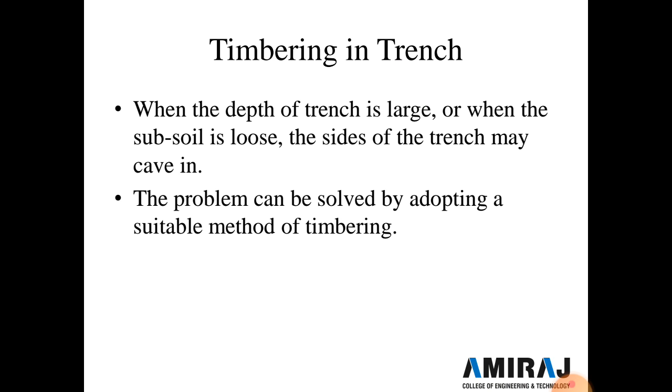Timbering of deep trenches can be done with the help of the following methods. There are 5 methods given here, and we will discuss them one by one.

The first method is the stay bracing method, second is the box sheeting method, third is the vertical sheeting method, fourth is the runner system, and fifth is the sheet pile method.

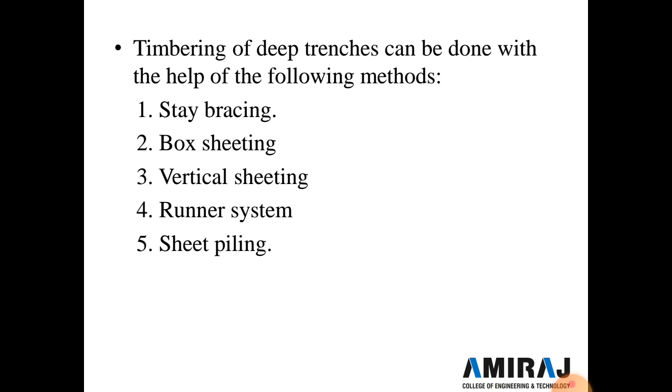Let's start with our first method, the stay bracing method. This method is used only for supporting the sides of a trench excavated in fairly firm soil when the depth of excavation does not exceed 2 meters. So up to 2 meters, the stay bracing method is used, and it supports the side of the excavation.

This method consists of placing vertical sheets or piling boards opposite each other against the two walls of the trench, and holding them in position by one or two rows of struts.

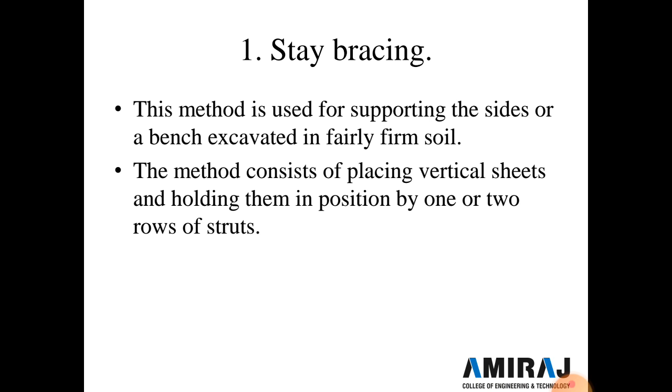The sheets are placed at an interval of 2 to 4 meters generally, and extend to the full height of the trench. The piling board may have a width of about 200 mm and thickness of 44 to 50 mm, and the strut may have a size of 100 mm by 100 mm for a trench up to 2 meter width, and 200 by 200 mm for a trench up to 4 meter width.

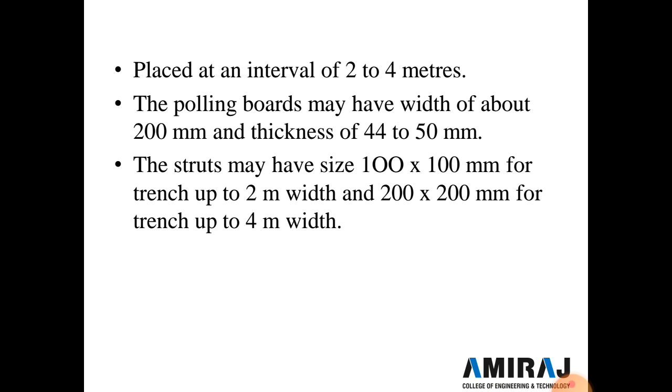See this figure: the piling board is supported by the strut, and this strut is fixed on the opposite side of the piling board. So no loose soil or other material falls down during the excavation. This type of method is only used up to 2 meters depth of excavation.

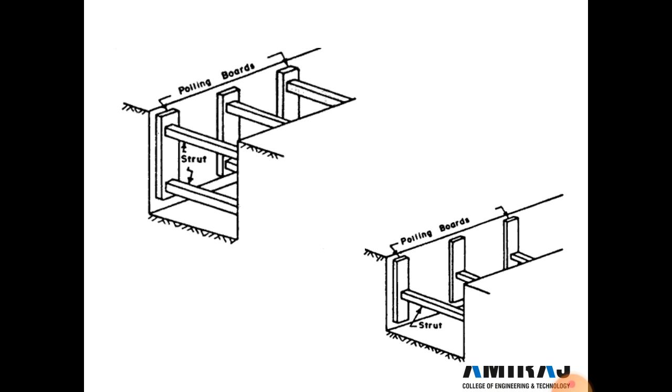Above 2 meters depth of excavation, the box sheeting type of timbering is required. In the next slide we discuss about box sheeting.

Another system of box sheeting, shown in the figure, is adopted in very loose soil. In this system, sheeting is provided longitudinally where it is supported by vertical walers and horizontal struts. If the height is more, braces are provided along with the struts.

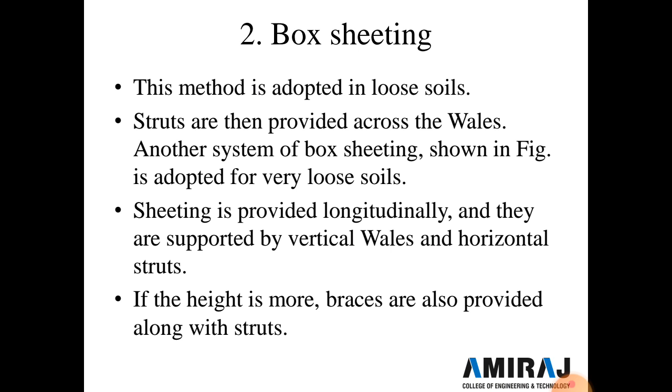In horizontal sheeting, a horizontal plank is provided and walers are fixed vertically. In vertical sheeting, the walers are provided horizontally, supporting the vertical sheeting.

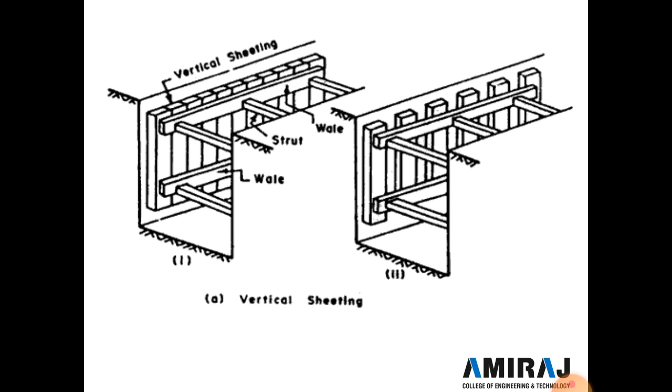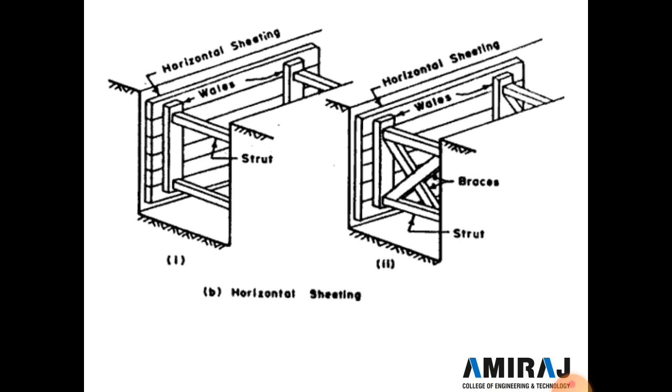In figure number 1, vertical sheeting with no gap is provided only where the soil is loose, like sandy soil. And in a regular soil where there is no loose material, this type of gap is provided for sheeting work. Now next we discuss the vertical sheeting.

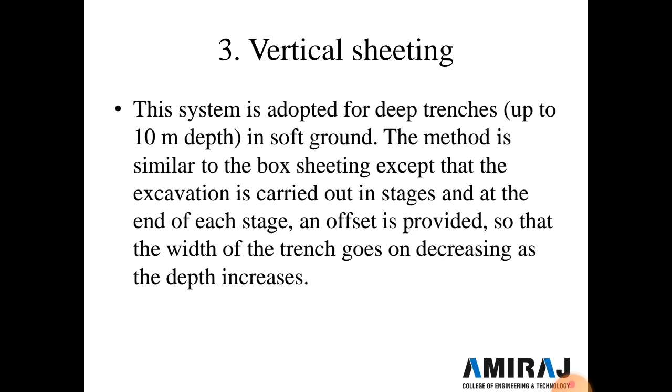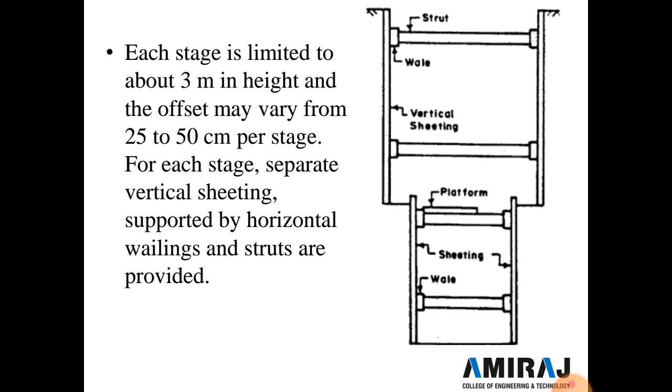This method is the same as the box sheeting method, but here the only difference is that an offset is provided at some interval. This type of method is only used up to 10 meter depth.

Now the next type of method is the runner system. This system is used in extremely loose and soft ground, which needs immediate support as excavation progresses. The system is similar to vertical sheeting of the box system, except that in place of vertical sheeting, runners made of long thick wooden sheets or planks with an iron shoe at the end are provided, and walings and struts are provided as usual.

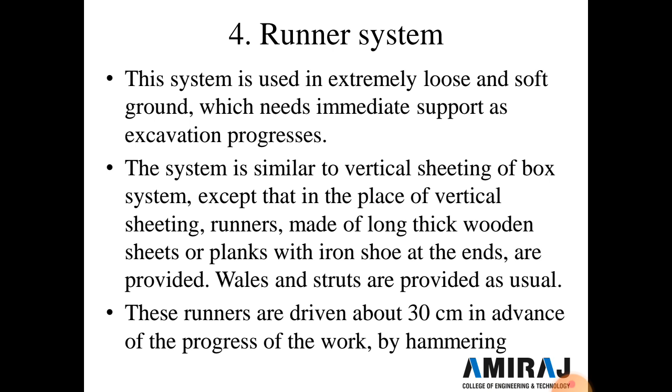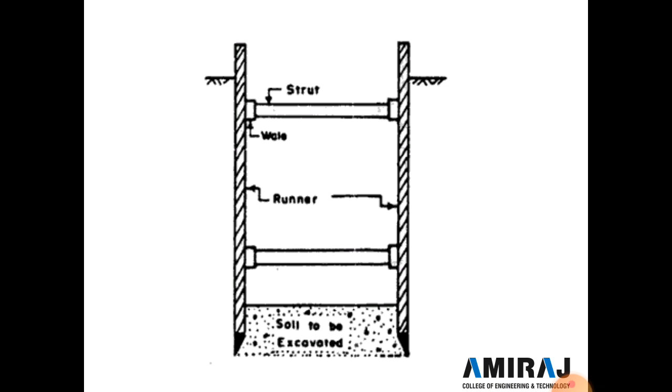In this figure you can see the runner system. The wooden plank or sheet which looks like a runner is fixed, and below the runner shoe is provided to fix the sheets in the ground. To support the two sheets a horizontal strut is fixed, and a waling is fixed to support the vertical sheets.

Now the next and last type of method for timbering in trenches is sheet piling. This method is adopted when the soil being excavated is soft or loose, the depth of excavation is large, the width of the trench is also large, and there is subsoil water. Sheet piles are designed to resist the lateral earth pressure.

These are driven into the ground mechanically by means of pile driving equipment, and these can be used for excavation to very large depth. So in sheet piling, a sheet is fixed in the ground at the location where excavation is required.

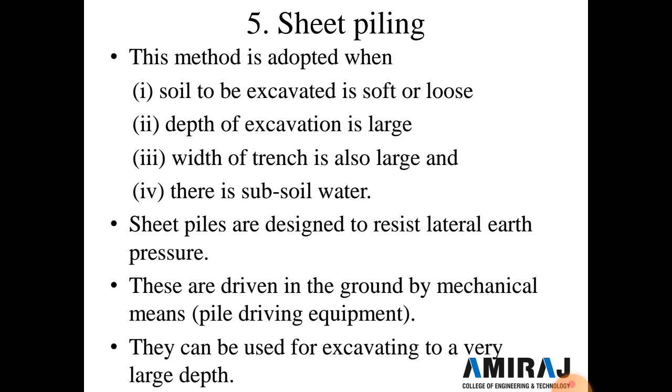Now the next topic we discuss in this lecture is control of groundwater in excavation. During excavation time, we see groundwater, and this groundwater affects or creates problems during excavation. Let's start this topic, control of groundwater in excavation.

Now what is dewatering, or how to control the groundwater? First we dewater the entire area. Dewatering means the removal of water from saturated soil. Dewatering is a necessary process in many construction projects, particularly for underground projects. During excavation this problem is always faced in excavation for foundations and also basement construction, so here dewatering is compulsorily required.

Dewatering is also required during the monsoon season. If we construct a building in monsoon season, excavation for the foundation is done, and due to monsoon, water fills up in the excavated area, so dewatering is required.

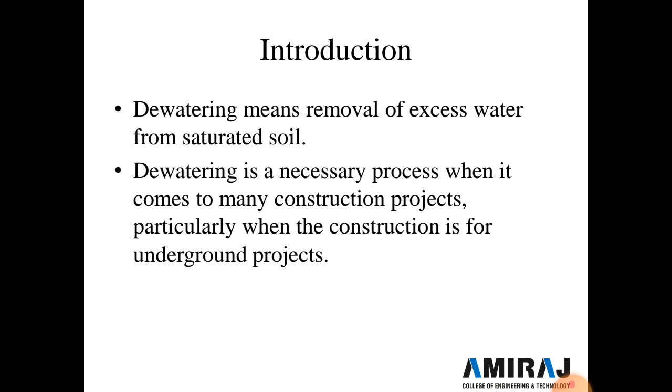Now let's start with the different dewatering methods. In choosing a dewatering method, factors such as the type of soil and nature of the construction site will influence which dewatering method will best suit the project. There are 9 methods for dewatering.

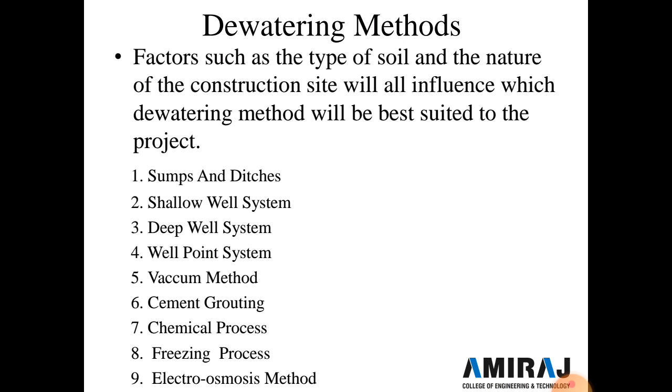First one is sumps and ditches. Second one is shallow well system. Third one is deep well system. Fourth one is well point system. Fifth one is vacuum method. Sixth one is cement grouting. Seventh is chemical process. Eighth one is freezing process, and ninth one is electro-osmosis method. So let's start with the first method, sump and ditch method.

So it is the simplest and most commonly used dewatering method. In this method, shallow pits called sumps are dug along the periphery of the area and connected by drains, semicircular in shape and 20 centimeters in diameter. Water from the slopes flows under gravity and is collected in the sumps, from which the sump pump pumps out the water.

So it's the sump and ditch method. This method is generally used in large excavated areas. Here at the periphery of the trench, a sump pump is provided at regular intervals to remove water from the entire area. Now the next method is the shallow well system.

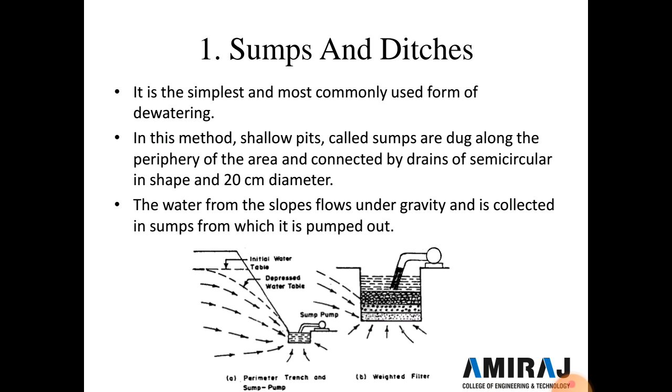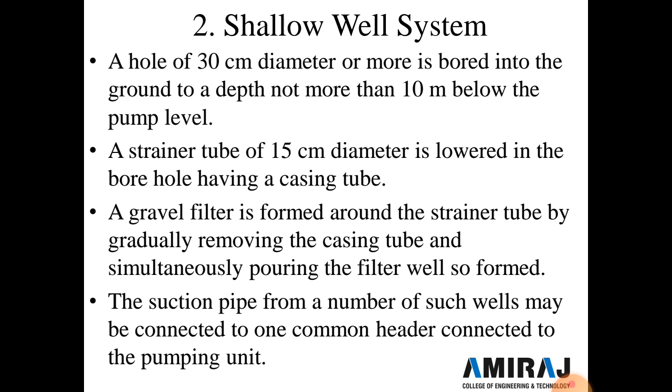A strainer tube of 15 centimeters diameter is lowered into the borehole having a casing tube, and a gravel filter is formed around the strainer tube by gradually removing the casing tube while simultaneously pouring the filter. The suction pipes from a number of such wells may be connected to one common header connected to the pumping units. The shallow well system is also used for large excavated areas.

Now the next method is the deep well system. This is more suitable when the depth of excavation is more than 16 meters, or where artesian water is present. In this method, a 15 to 16 centimeter diameter hole is bored.

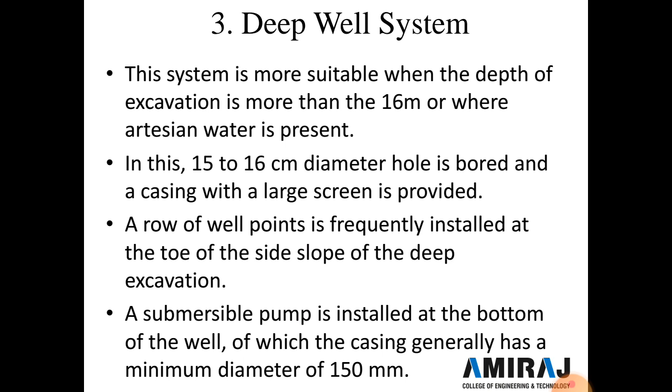A casing with a large screen is provided, and a row of well points is frequently installed at the toe of the side slope of a deep excavation. The submersible pump is installed at the bottom of the well, whose casing generally has a minimum diameter of 150 mm. You can see this exactly in the figure.

Here the submersible pump removes all the water that comes into the pipe, and this water is pure water without any effect. The discharge pipe from the submersible pump of a number of adjacent wells is tied to a common delivery main, and the water is raised from the well by a multi-stage pump. This method is used only where the groundwater level is higher and groundwater is maximum. This type of method is generally used in such cases.

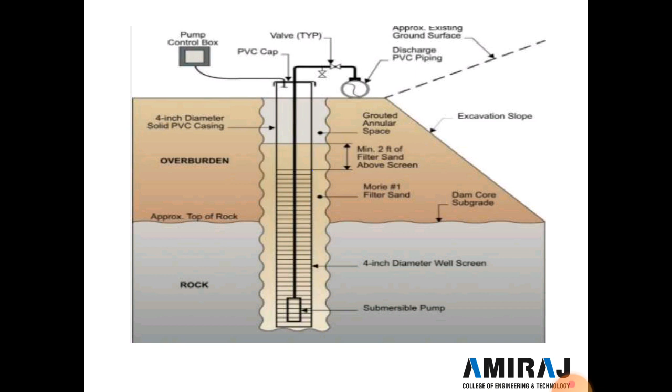Now the fourth type of method is the well point system. The main components of the well point system are the well point, riser pipe, swinger arm, header pipe, and pumps. The well point is a perforated pipe of 5 to 8 centimeters in diameter and 1 meter long.

It is covered by cylindrical wire gauze, and the pipes are jetted into the ground 1 to 2 meters apart. The well point, riser pipe, swinger arm, and header are fixed with each other. This system is suitable for groundwater up to a level of 5 to 6 meters, and this type of system is used accordingly.

So in this system, by the header and the well point, all the groundwater is collected, and then using the pump or header, we remove all the water.

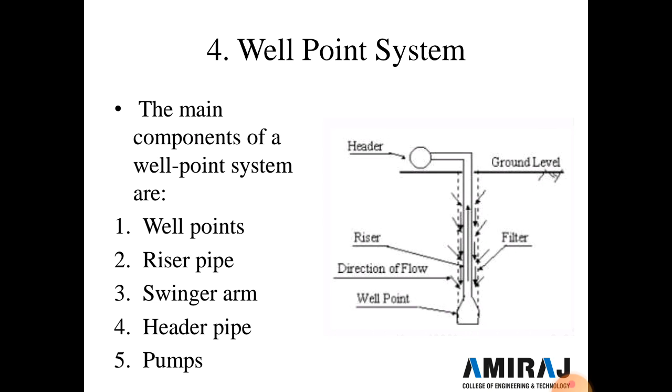Now the next type of method is the vacuum method. In this method, when draining is required for silt or clay which has a particle size less than 0.05 mm, a vacuum pump system is required. The process is that well points are driven, and a 25 centimeter diameter hole is provided around the well point.

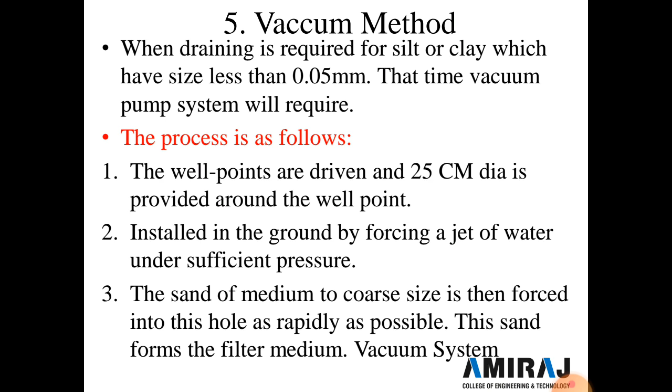It is installed in the ground by forcing a jet of water under sufficient pressure, and sand of medium coarse size is then forced into the holes as rapidly as possible. This sand forms a filter medium for the vacuum system. In the uppermost 600 mm to 900 mm, an impervious material such as clay is tamped to form a seal at the upper portion, and pumping is then carried out by equipment capable of maintaining a vacuum in the well point and surrounding filter.

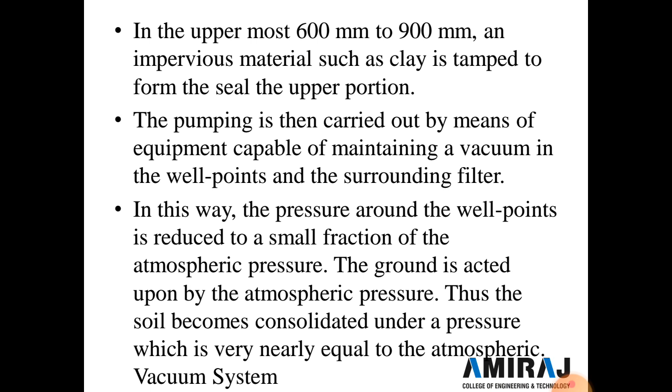In this method, the pressure around the well point is reduced to a small fraction of atmospheric pressure, and the ground is acted upon by atmospheric pressure. Thus the soil becomes consolidated under a pressure very nearly equal to atmospheric: the vacuum system.

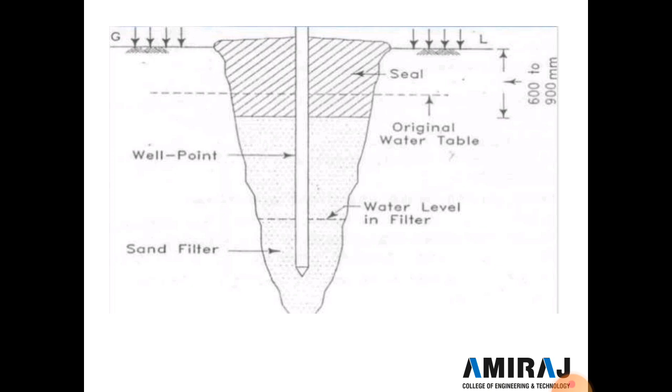So see this system. In this system, the well point is fixed in the ground, a sand filter is provided at the bottom, and the upper part is very well fixed. In this method the well point is fixed by the pressure of the water, and around the periphery a 25 centimeter diameter open area is required for easily moving the water.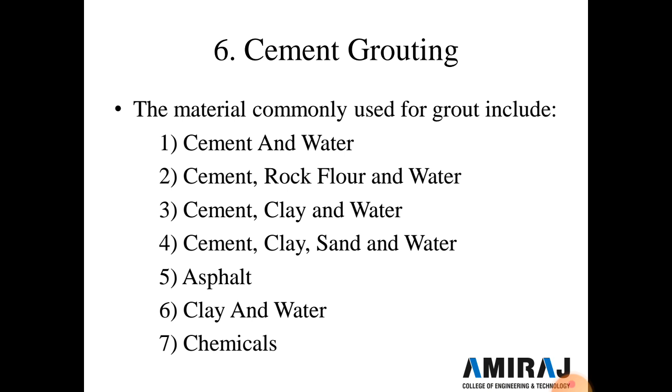Now the next method is the cement grouting method. The materials commonly used for grouting are cement and water, cement rock flour and water, cement clay and water, cement clay sand and water, asphalt and clay and water, and chemicals. So this is the cement grouting method you see.

So by pressure, the cement grout is forcefully filled into the gaps in the area, and after filling the cement paste in the soil, water is removed by jet grouting. In both figures you can see: on the left side cement grouting is done, and on the right side jet grouting is done. In jet grouting, water is removed from the entire area.

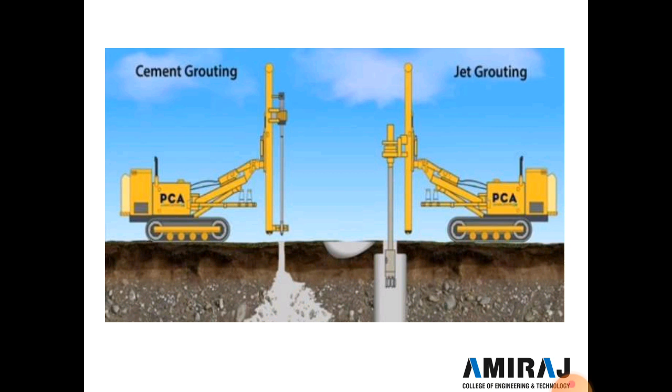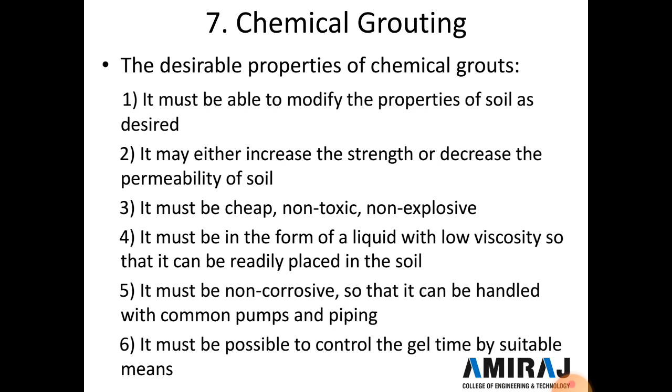Now the seventh type of process is chemical grouting. The desired properties of a chemical grout: it must be able to modify the properties of the soil as desired, either increasing the strength or decreasing the permeability of the soil. It must be cheap, non-toxic and non-explosive, and in the form of a liquid with low viscosity so that it can be readily placed in the soil. It must be non-corrosive so that it can be handled with common pumps and pipes. It must be possible to control the gel time by suitable means.

So here you can see in the figure, a high pressure hydraulic pump is used in chemical grouting. In chemical grouting, chemicals are forcefully inserted or injected into the soil to prevent the soil from collapsing. Pressure gauge monitoring is required to control the pressure in chemical grouting.

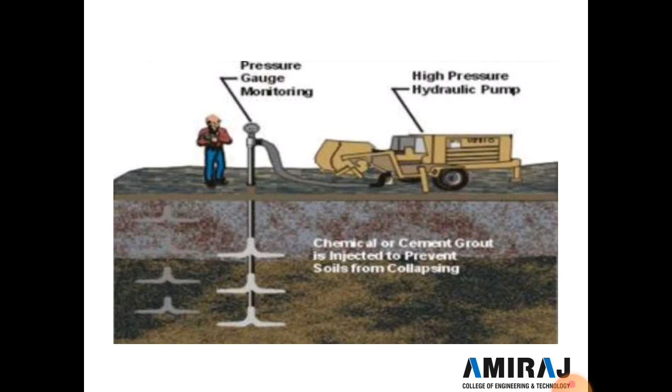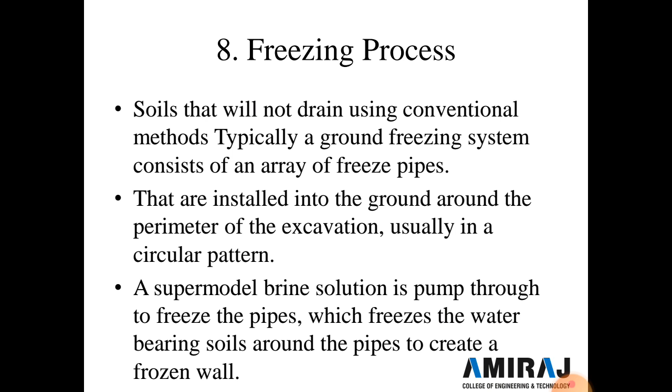Now the next method is the freezing process, used for soil that will not drain using conventional methods. Typically, a ground freezing system consists of an array of freeze pipes installed in the ground around the perimeter of the excavation, usually in a circular pattern, and a supercooled brine solution is pumped through the pipes, which freezes the water-bearing soil around the pipes and creates a frozen wall. You can see it in the figure.

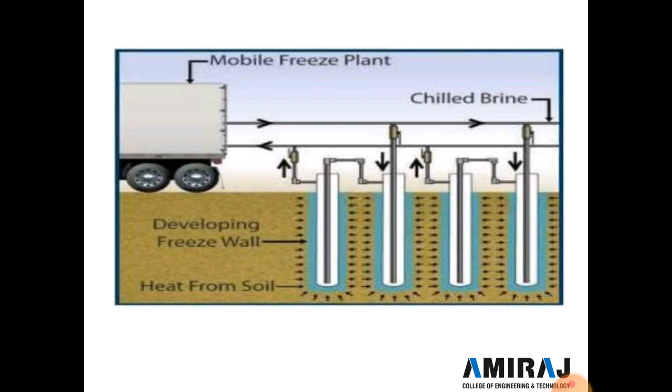So here a deep freezing wall is developed by the mobile freezing plant. The pipe is inserted in the ground, and then the freezing pipe is connected to the mobile freezing plant. Around the periphery of the freezing pipes the water freezes, all the water is frozen, and no water remains in liquid form.

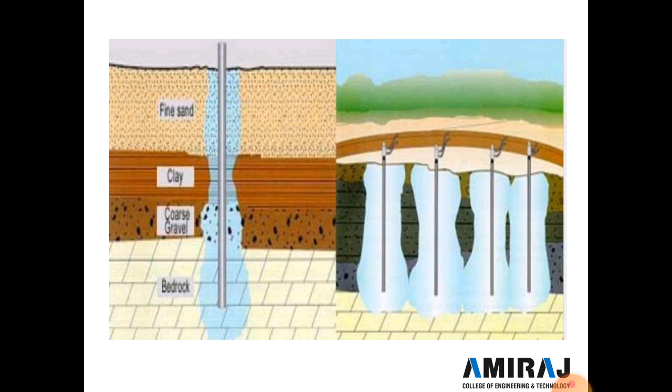A steel rod, pipe, or steel piling of the excavation can serve as the cathode, and the electrodes are arranged so that the natural direction of water flow is reversed away from the excavation, increasing the strength and stability of the soil or slope. The potentials generally used are from 40 to 180 volts with electrode spacing of 4 to 5 meters. This is called the electroosmosis method.